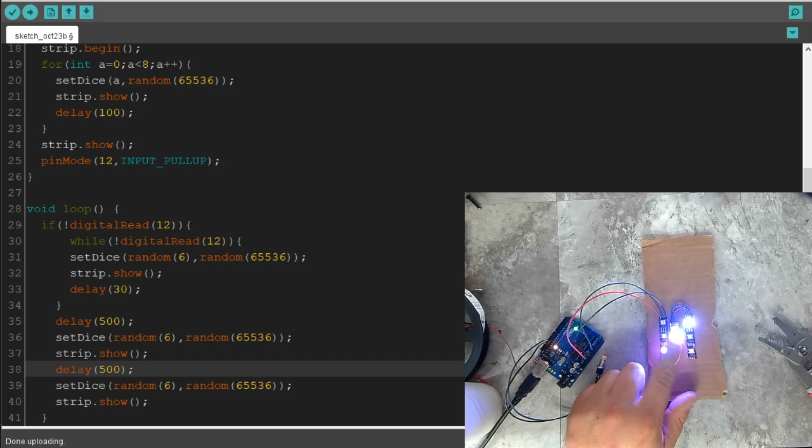All right, so now we're on to 216. We'll be making a Yahtzee game here. So right now we got a single dice, right? I hit the button and it starts rolling the dice, and it has a little bit of theater at the end. So I let go, and then the dice settles onto a number, right?

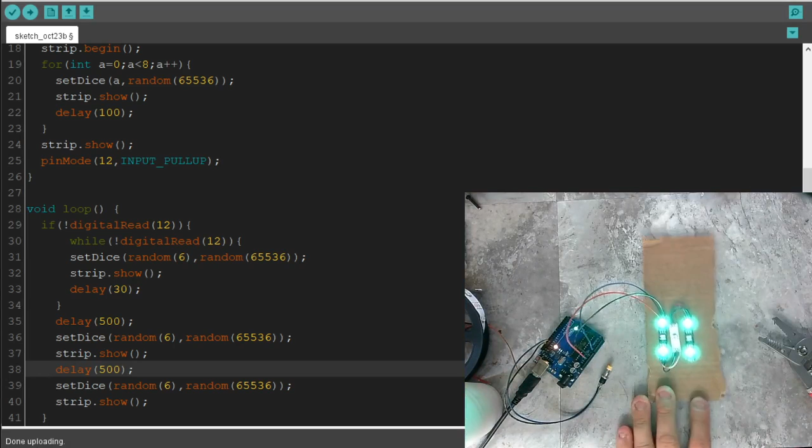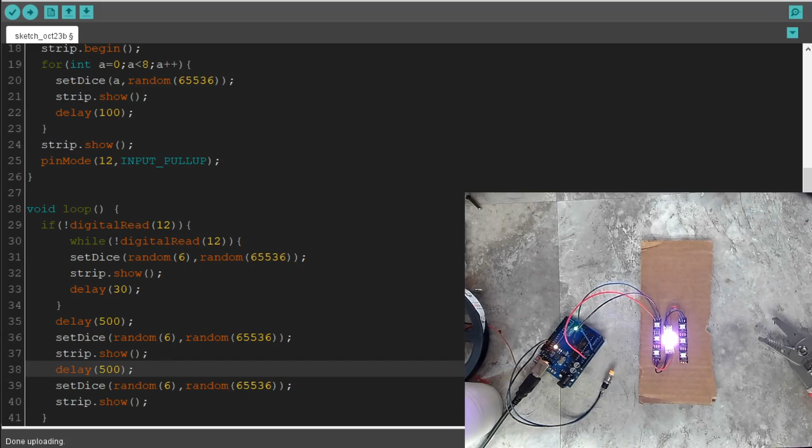So just use the sticky side, put it on cardboard, really quick soldering. Nothing fancy here, but it works. Okay, so this is our little prototype. Okay, next thing we're gonna do is have five of these in a row. In Yahtzee, there are five dice here, and I'll show you how to do that.

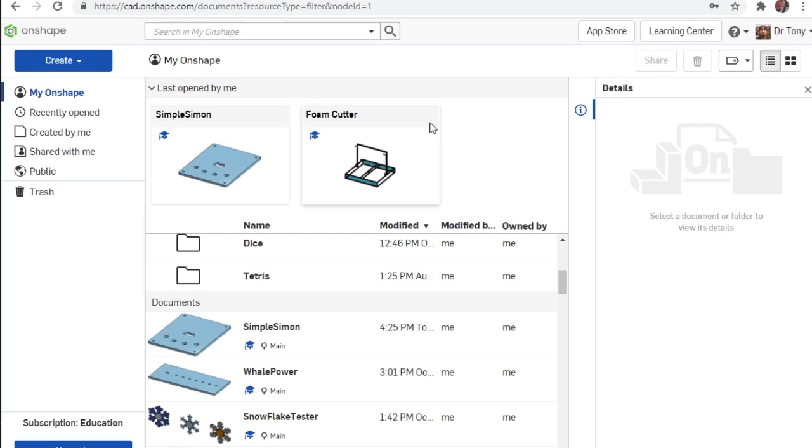So let's take a look at the design software. Okay, I like to use Onshape. That's my preferred design software. Okay, so let's create a document. We'll call it Yahtzee, and I'm pretty sure that's how it's spelled. And here's our works area, right? Okay, so I've got 30 per 1,000 millimeters, 1 meter, 30 per meter, and I've got 60 per meter. There we go.

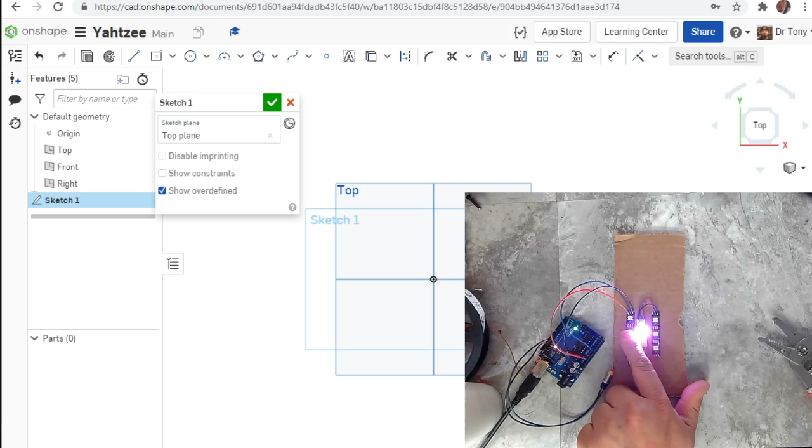Okay. So my plan here is to use 60 per meter for the center row, and then 30 per meter for the outside row, and skip one of the pixels every time. Okay. So I'm gonna waste 4 pixels. I guess I could use them for something, but really, I don't care. I'm just gonna skip them, make programming easier. Not a big deal. So let's work on that.

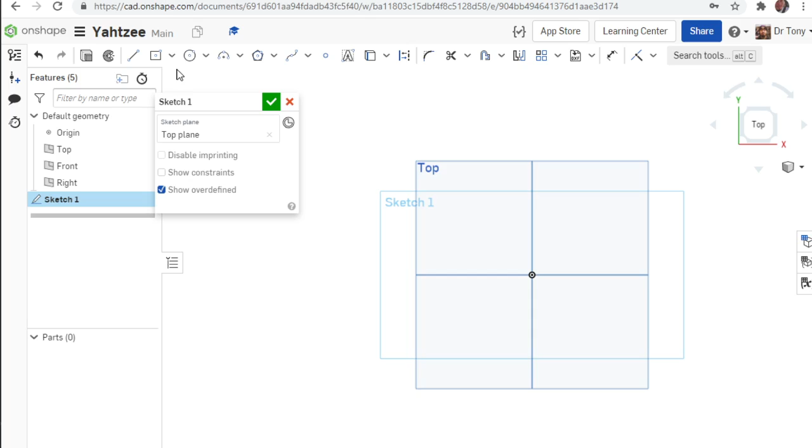So in our sketch here, I want some pixels in the middle, right? And I'm gonna make not a circle, I'm gonna make a square for the actual pixel to sit. So these are SMD 5050 pixels, which means they're 5.0 by 5.0, right? There's also 3535 neopixels, which is 3.5 by 3.5. Got some of those too, but 5050 is 5.0, right?

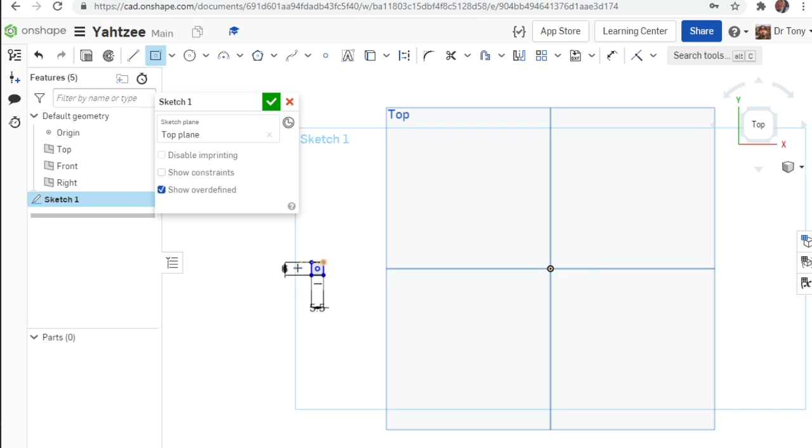So I'm going to give it a little extra space, 5.5, and give it a lot of extra space up and down so I can fit the solder joints that are in this thing. Okay? So I've got this here. Now I'm going to select it, and the distance is 1,000 divided by 60. Right? Okay, 1,000 divided by 60.

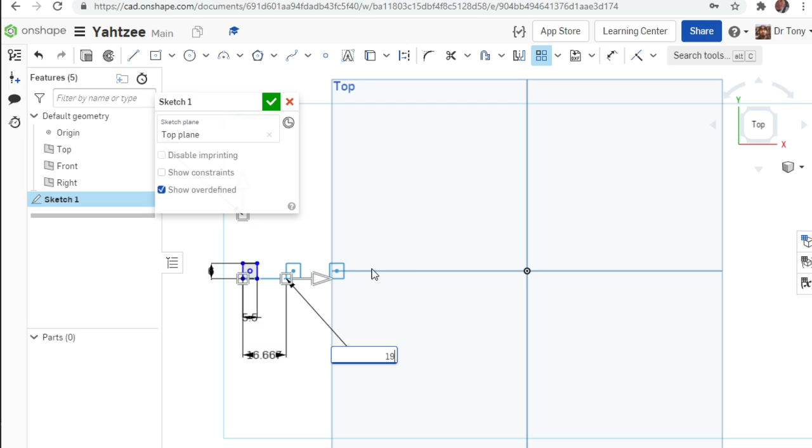I'm also going to need 3 times 5, which is 15, plus one in the middle, a sacrificial one. I'll show you what that means in a little bit here. Between the five, there's 4 spaces, right? So that's 19. So I need 19 pixels. There we go. Okay. And I think that's the center one. I'm going to lock that to the center here. Coincide those. Perfect. All right, wasn't the exact center, but that's okay.

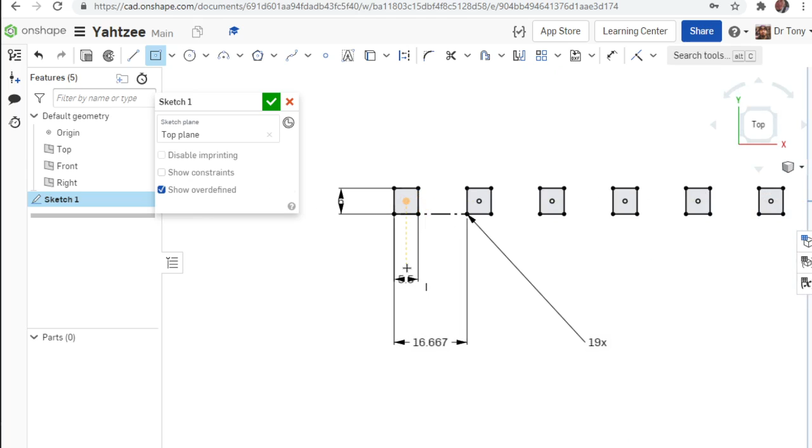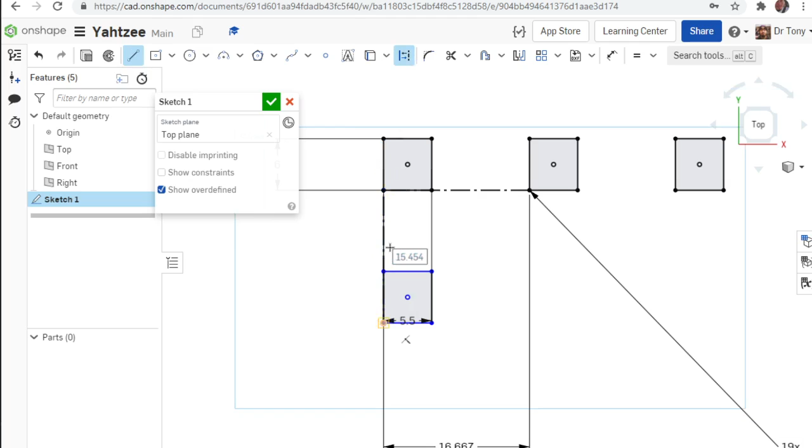I'm going to make another center point rectangle down here. Okay. Make it like that. Okay. This line and this line are equal. Perfect. Okay, now we got this line saying how far they are from each other, right? I'm going to do the exact same thing from here to here. There we go. Still blue. We're good. This line and this line are also equal. Cool. So we're going to be evenly spaced.

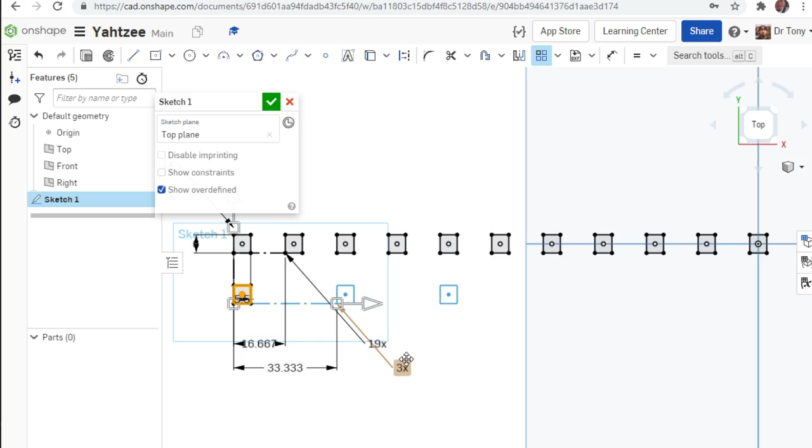And now I'm going to array these, do a pattern. So the top ones are 1,000 divided by 60. I'm going to use 30 per meter, so 1,000 divided by 30 for the ones down here, right? Okay, and I need 9 of these. 9? I need an even number, don't I? So 1, 2. I need 10 of these. 10. Perfect. Okay. There we go.

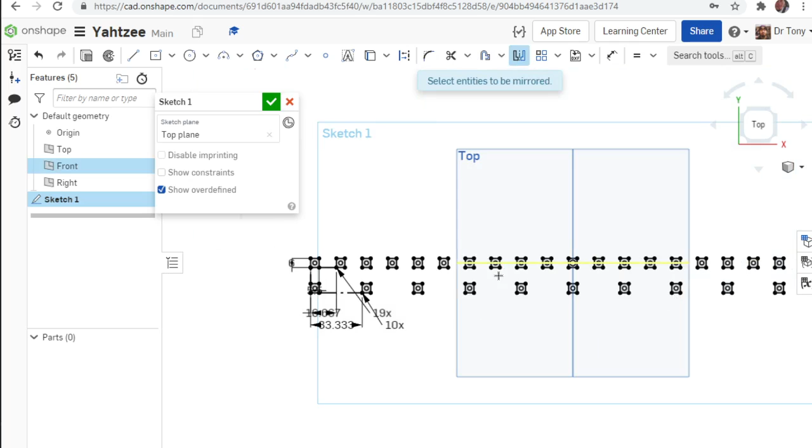Okay. And so now I'm going to do a mirror function. Grab the middle line. Select everything on bottom. There we go. Okay. So basically here's one dice, right? Then we skip that pixel. Here's another dice, right? Skip that pixel. Here's another dice. All right, I guess this is the center point, not that. Let's delete that constraint. And then move this around on top of that. There we go. Now we're centered in here.

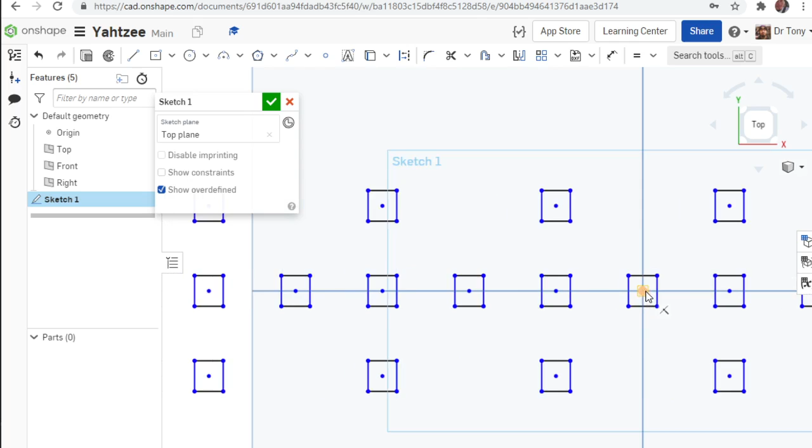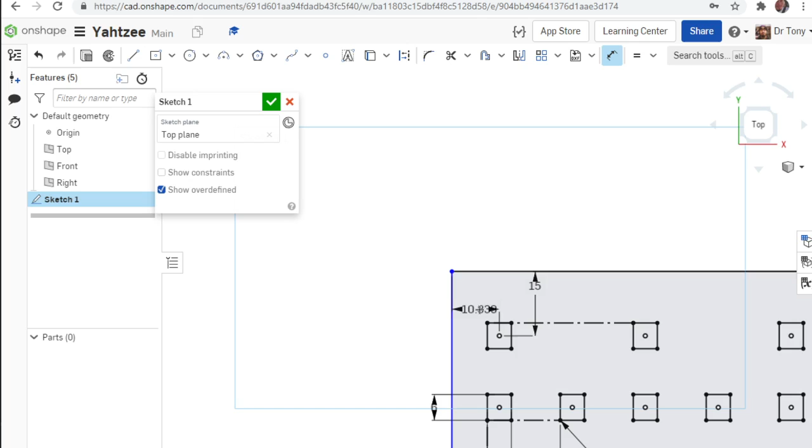Okay, cool. And now I'm going to put a rectangle around this. I'm going to start it from the bottom, and I'll show you why in a little bit. So let's make this. No, I guess from the center point, not the edge. From the center here, I'll do 15. From this point, I'll do 15. Okay? So this is just the first layer, the holding layer. Right? There's going to be a couple layers going on here.

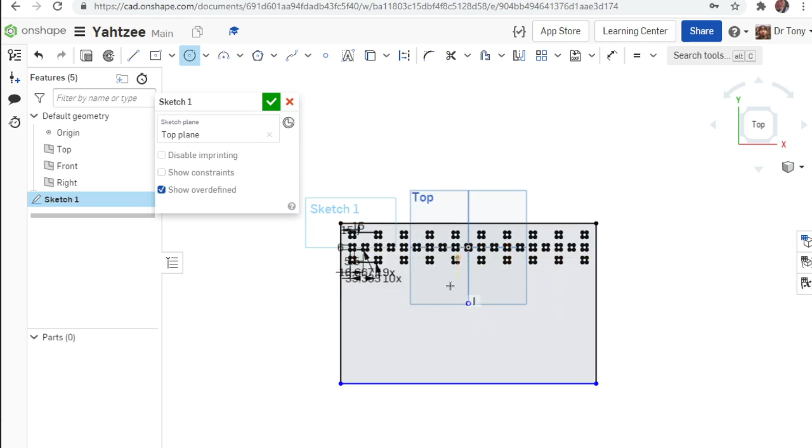Okay? Next thing we're going to do is buttons. So each one of these needs a button underneath it to hold the dice, right? So when you roll the dice, all these shuffle, right? Then you let it go, and then you need to hold some, and then shuffle the rest. So we need buttons down here to do that holding.

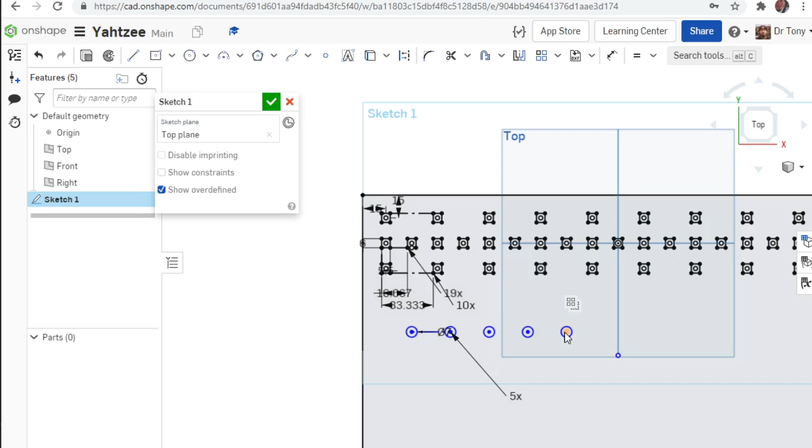Okay, so from this point, lock there. Last time I made it 6, I made them too small. These buttons are 7 this time. We'll see if that works out. Okay. And we want 5 of these buttons. Click that I'm done. Get rid of that constraint. And then I'm going to lock this over here to this and do a vertical constraint to that. There we go. So now it's held on to it.

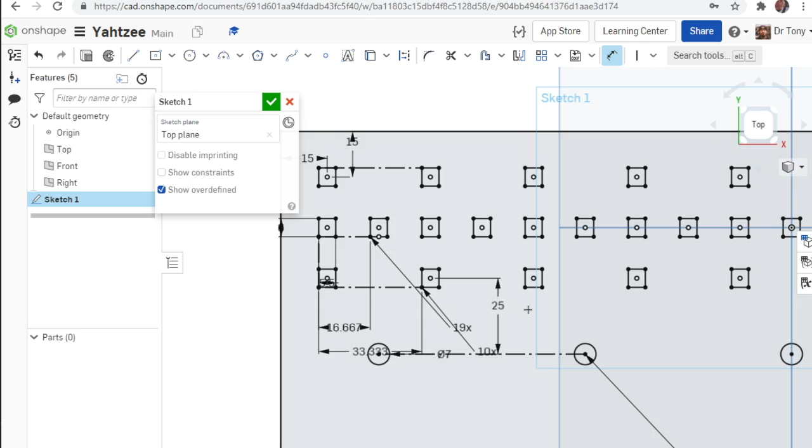Cool. I can still move up and down. I don't know how far I want to be. I don't want to be too close. Let's do this to the center line here. Let's see, that's 30. 25 is about an inch. Yeah, let's go with that. Okay, that works. And then we need, let's see, a strip right here, or button down here. That'll be our reset button.

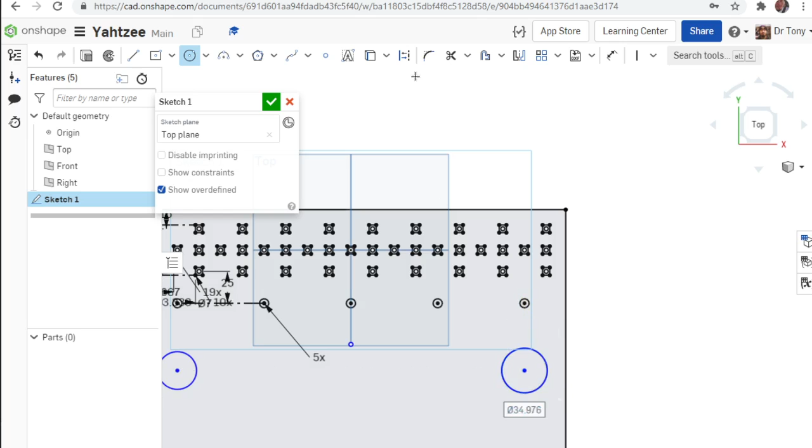And a button, let's see, float over this point, float over this point, come down here. There we go. Now they want to lock. So this will be our roll, right? We hold this button to roll it. We use these buttons to select whatever ones we want to hold, and then we hit this to roll the rest of the ones that aren't held. And then this button will do a reset, and so it'll turn off all the dice. We'll get to roll them again.

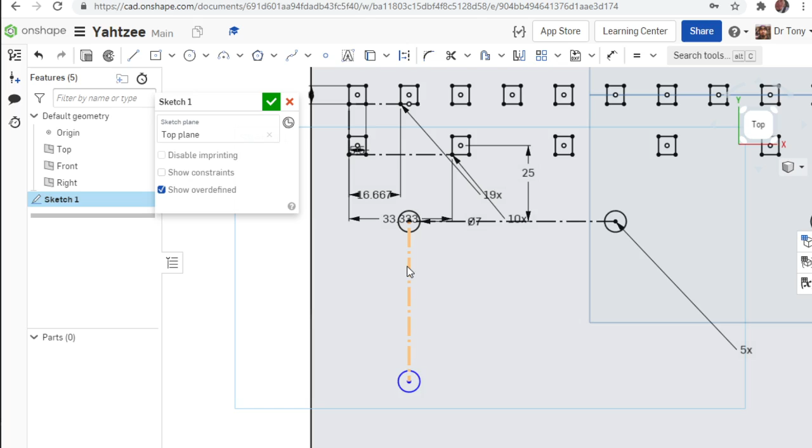Okay, select this, and this first one. Make them equal to each other. There we go. Okay, gonna make a construction line. Cool. See, this and this are equal. There we go. Okay. And then we need a little bit of a display in the middle here. So I'm going to sort of do it lazy-like. I'm just going to make a line hanging out, floating. Okay. Do a mirror.

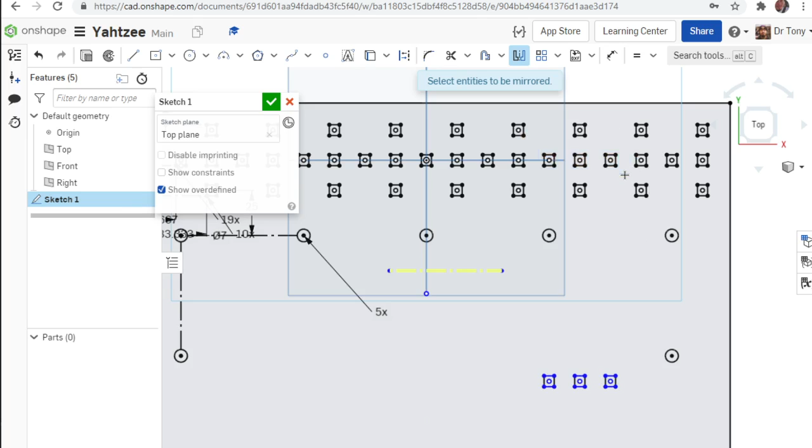And let's see. I guess I'll have it to the side, so I don't want this one in the way. How about right next to the shuffle? There we go. And so what I'm going to do here is use this to count how many times I've basically rolled. Okay. There we go. And I guess I'll have this 15 from the bottom here. 15. All right. There we go.

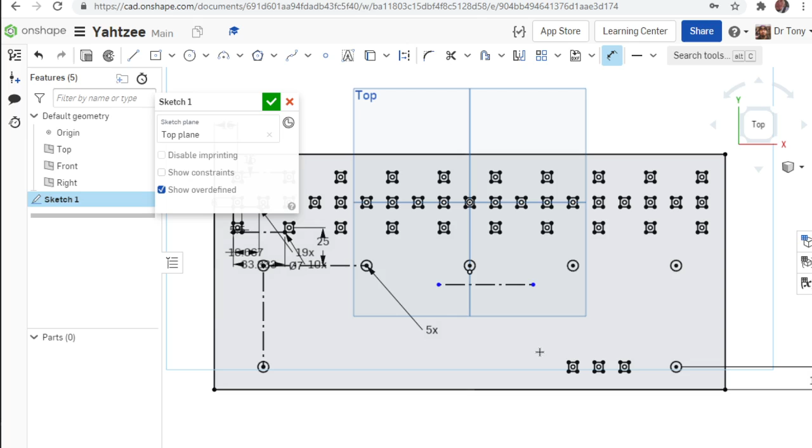And then all this right here, I can say Yahtzee, made by Tony, whatever else I want to say, or power switch. I guess I could do batteries and power switch. Maybe. Huh. Yeah, I'll do a battery on another one, or power switch on another one. That'll probably be in the 300 series, like making complete portable projects. So maybe that's a little advanced for 200. Okay. So, yeah, this is 216 here. So we're kind of a ways away from doing a lot of battery stuff. But, yeah, we'll call this good.

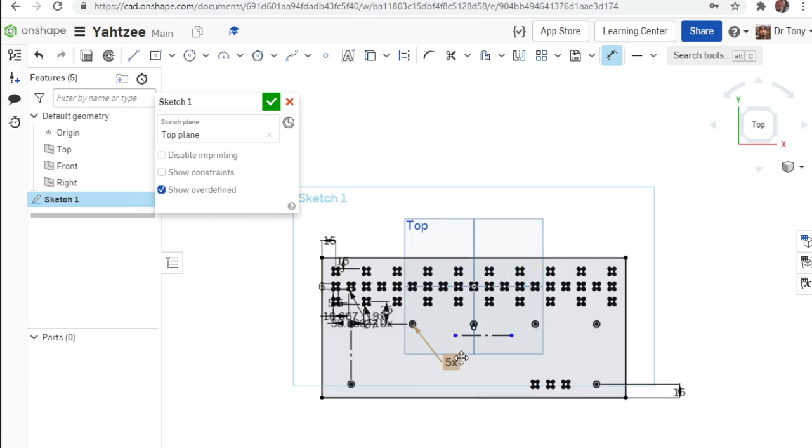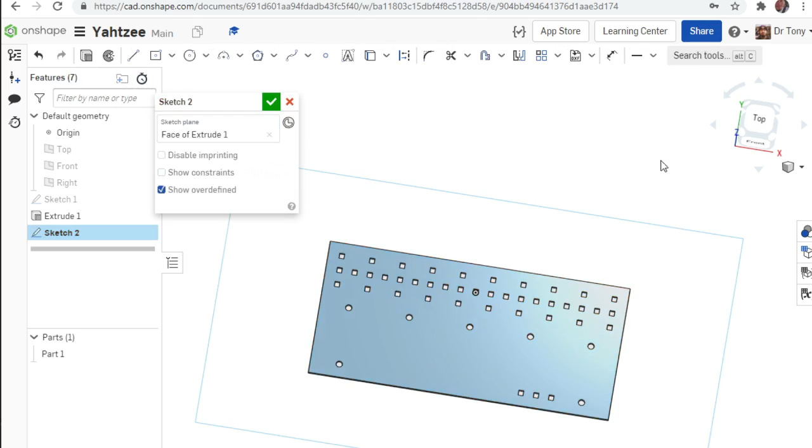I'm going to extrude this about 3, because I'm going to use 3mm acrylic. I'm going to turn off these annoying planes. There we go. So LEDs will fit in here. And then buttons will fit in here. Let's make one more. Whoops. Let's make one more layer to this. We're actually going to have 3 layers altogether. So I'm going to have these little circles in between all these.

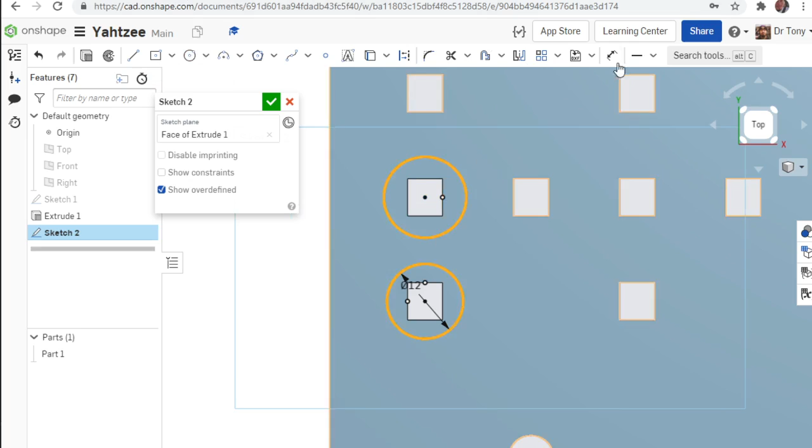Okay. Make them about 12 or so, right? Some place for it to actually shine. See, this will also be 12. So I'll take this and make them equal here. Okay. And then we need to array these. Whoops, not that. Turn that off. Turn this back on. Okay. There we go. And I think there were 19 of them. I don't remember. I can fix it later.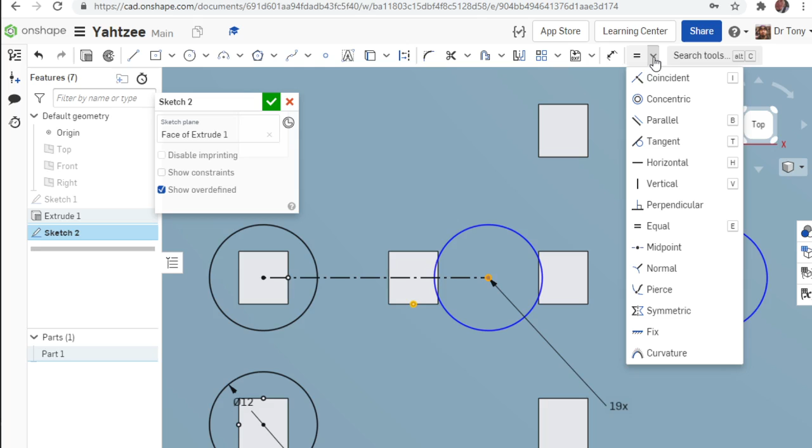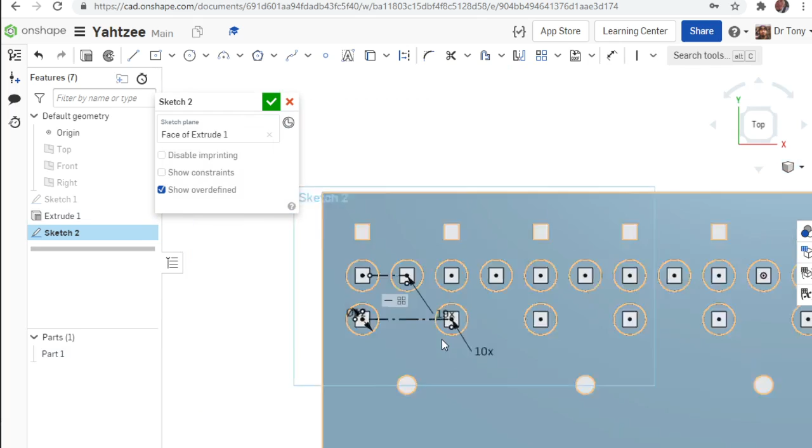Close that. Let's grab one of these. So this point and this point are now aligned. We got circles around all of them? Yep. Cool. Okay. And there were 10 of these. So you get rid of that. So you hover over. There's the center point. There's that. Do a vertical to that. Cool. Okay. Got little gaps there. Perfect. Take out my mirror.

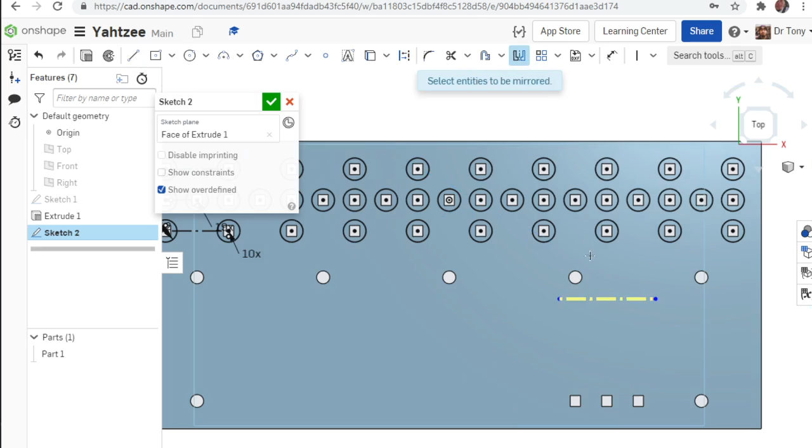And we want the front line. There we go. Cool. Okay. And then let's do similar to what we did just a little bit ago. So use my mirror. Grab this. See, I guess we're grabbing these three right here. Cool. Okay. Grabbing this point and this point, doing a horizontal constraint to this one. All right. And now we got the buttons.

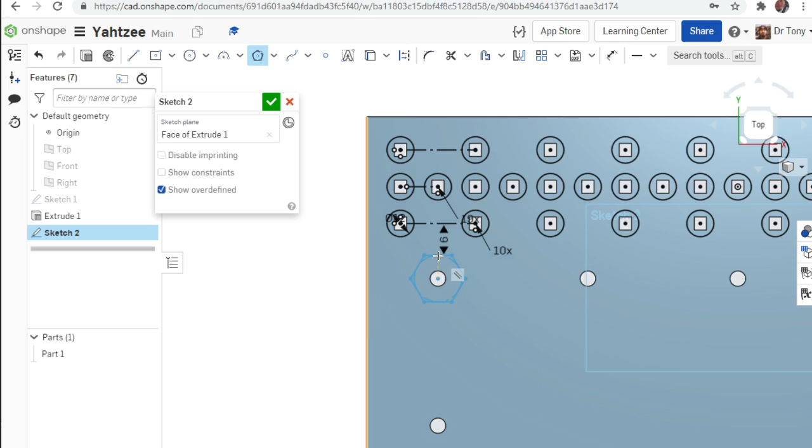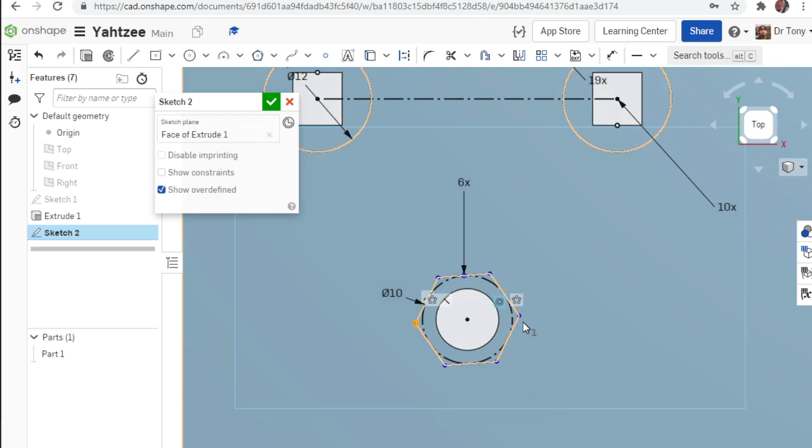So the little screw or the nut that holds them on is a 10 millimeter drive. So I'm going to take my polygon here. There we go. 6 sides. And I'm going to make this 10. All right. So then I can just tighten it from the back side, and this will hold on to that screw there. Cool. Okay, don't want that. So I'm going to take this and do a horizontal constraint. There we go. Now it can't rotate. And then we'll do an array.

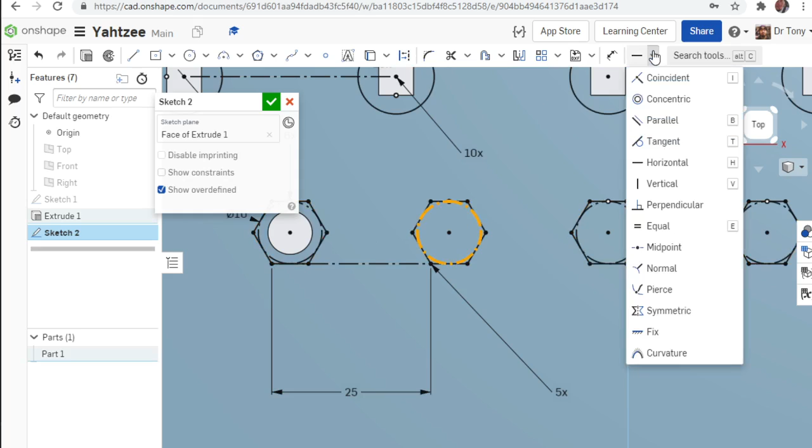And yeah, I really just want this. There we go. Okay, 5. Take the center of this—I guess not the center. Let's take that and this and do a concentric. Oh, it doesn't like it... oh yeah, got to get rid of that.

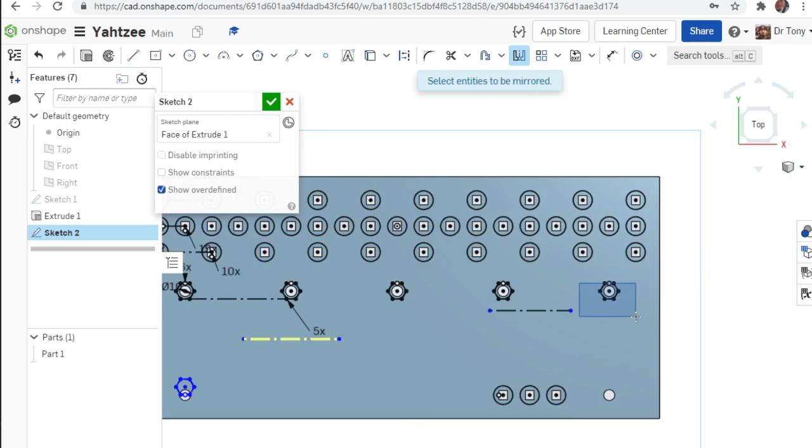There we go, perfect. Okay, then I'm going to do another lazy one with the mirror. There we go, do a mirror function. Select that... whoops, I think I missed. Yeah, I missed that one line up there.

There we go, okay, turn off my mirror. Grab this, grab this circle, make them concentric. Okay, we'll call that good. Let's see.

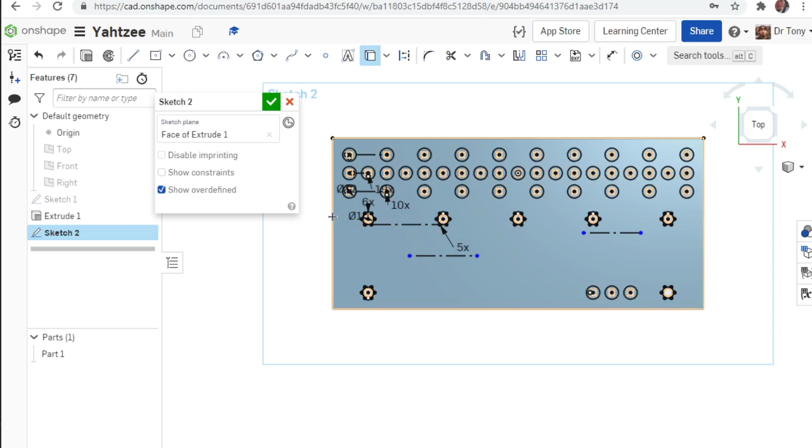Oh, we need to project these lines on the side. So use my project, project, project, project. All right, now we got all these. Let's extrude this, another 3, and make it new. There we go, okay.

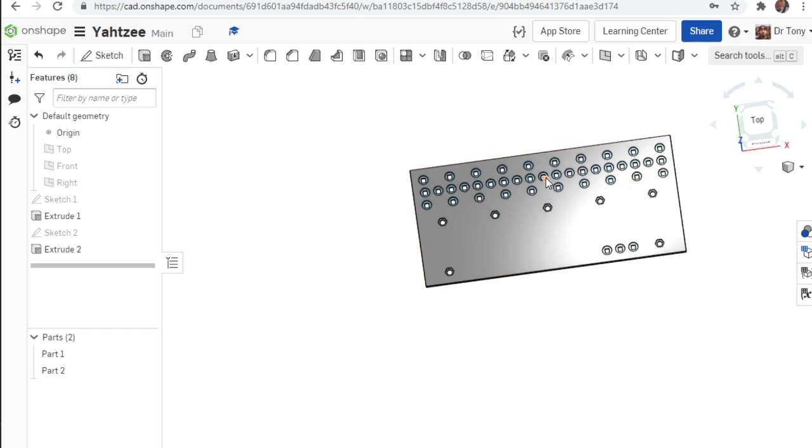And then we do the final layer here, and this will be sort of the clear coat. That one doesn't take much here. So we do a project, project, project, project. And that's really it—maybe a square for the logo if I want, but I don't know, I'll worry about it later. Yeah, so this is just a clear cover.

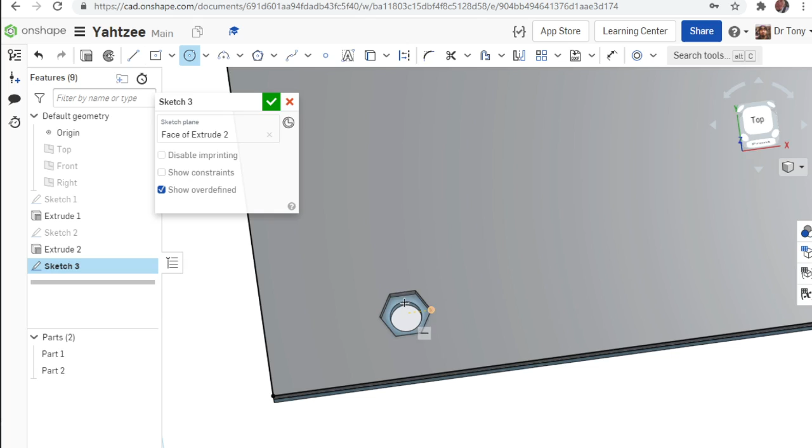Oh, I guess I need holes for the button now. Okay, so each one of these—let's see, I guess I'll do it on this one, that. Okay, and I'll make that not that big, 15 maybe. That's still bigger than necessary, but that's all right.

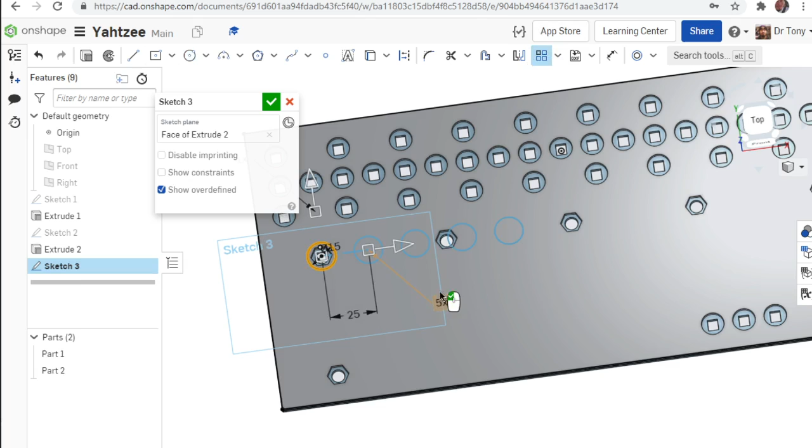Okay, do the array tool. There we go, pull that off. Okay, grab these two points, I'm going to make a vertical constraint. There we go, now we have a little circle on top.

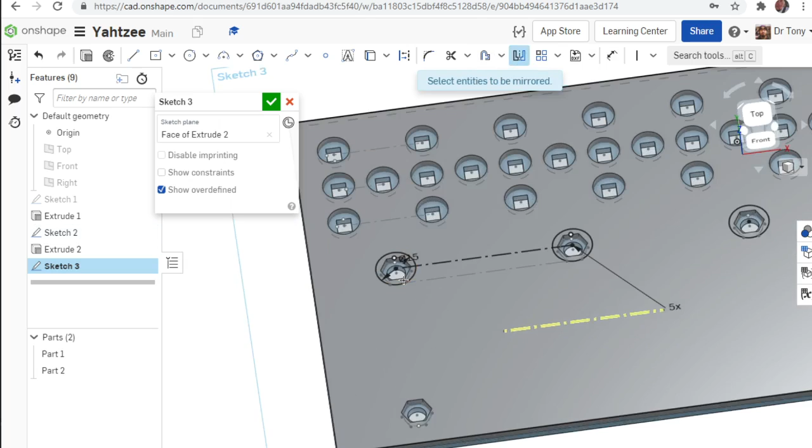And then I'm actually going to turn this sketch on. So you do a mirror function, steal this line. I want a hole there and a hole there. Cool, turn that sketch back off.

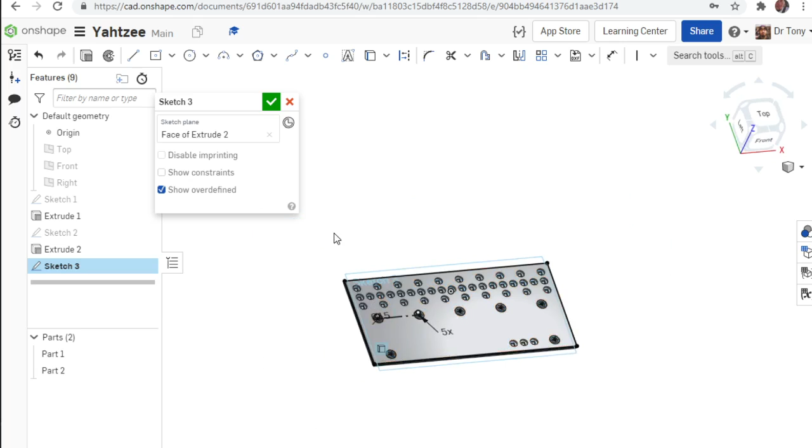All right, cool. Everything else will sort of mask and diffuse the lights. Okay, so even though these are able to light up, I don't have to light them up and they won't show. Maybe I could have them turn red when I've done too many rolls, I don't know, I've got that option. I'll figure that out. Then we need to extrude this, and then we're going to go 3 millimeters here. Make it new, all right.

Right click, edit appearance, do a semi see-through with a dark. There we go, so now you can see through what it's sort of going to look like. I'm going to use like a milky sort of look—that way it diffuses nicely.

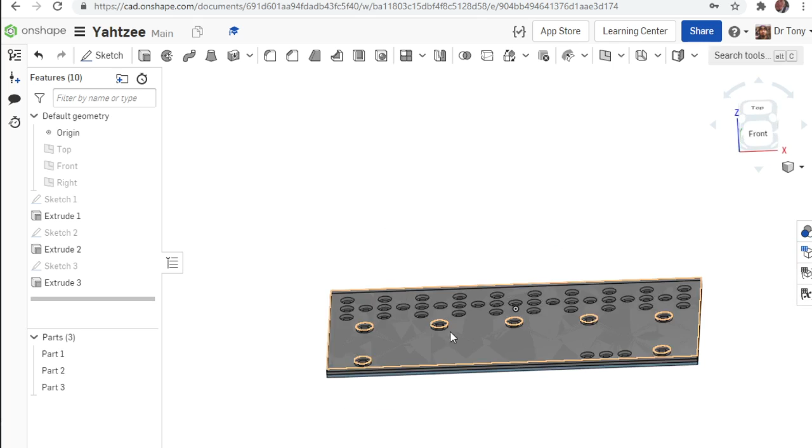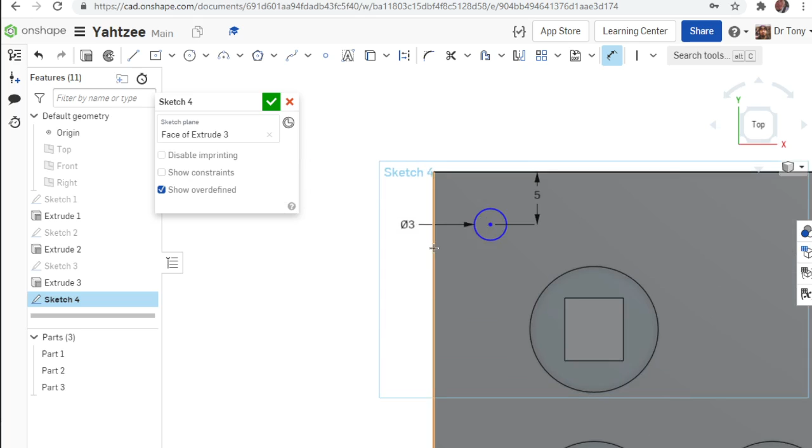Okay, and then let's make some mounting holes for everything so we can actually attach it all together here. So make that 3... 5 from the corner, kind of common of my stuff. 5 from the corner, there we go.

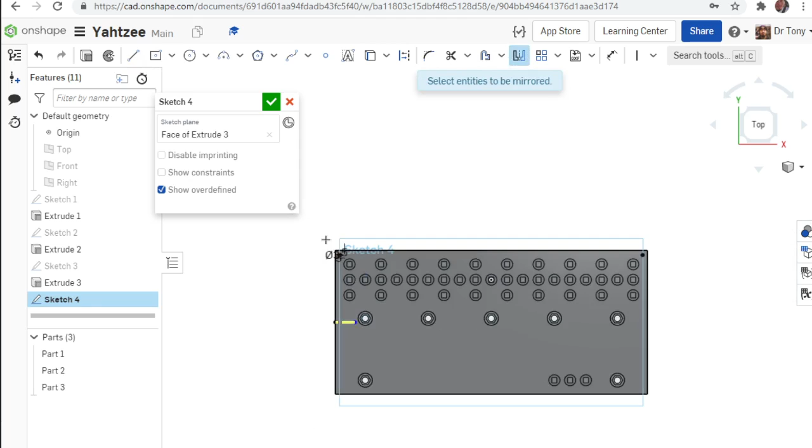Okay, I'm going to do a mirror. Let's see, what would that be, the right side. And then select that, there we go. And we don't quite have a center line for this, so I'm going to find the center. There we go, and use that as my mirror line. Select that—see, I want that, and I want that, okay.

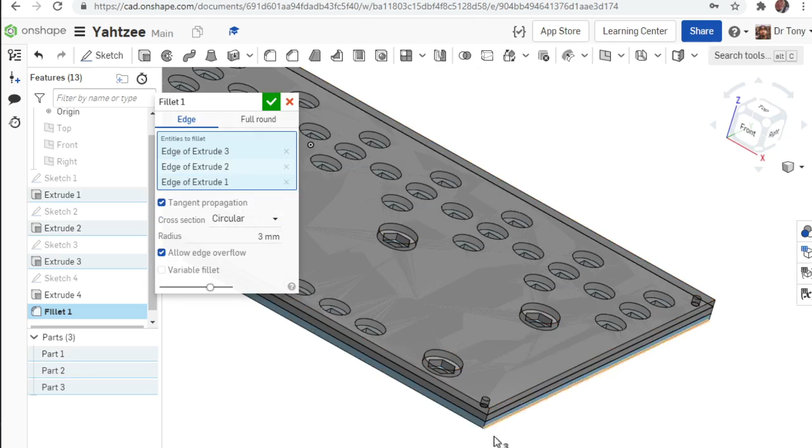So these are just alignment holes, right? So take this, going to remove, merge with all, right? Make the holes all the way through. All right, last thing we're going to do is round the corners, because we all like round corners. I'm a big fan anyways. All right, one more corner here.

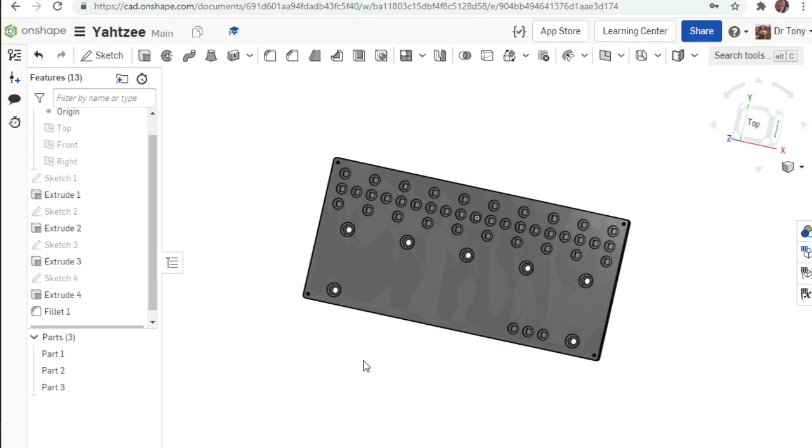All right, there we go. Okay, so here's our Yahtzee game. And I'll take one of these and put them on the bottom also. Actually, I'll put a plane up here, offset it—yeah, I think those are 30 millimeter standoffs.

There we go, and then sketch on this thing. Whoops, close that, there we go. Sketch on that thing, perfect. Turn off the plane.

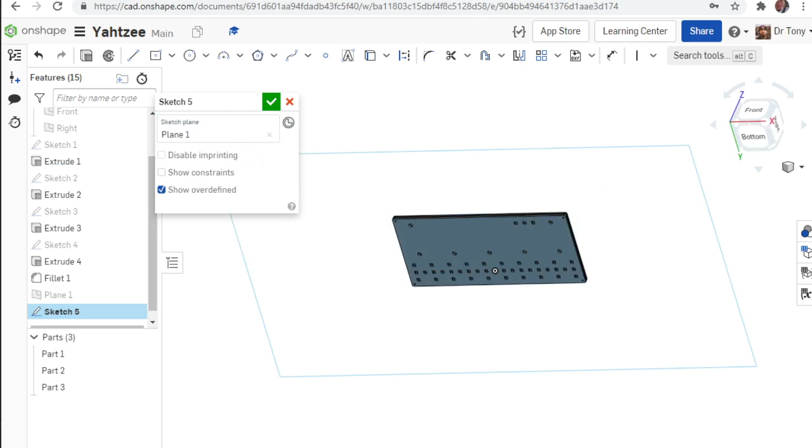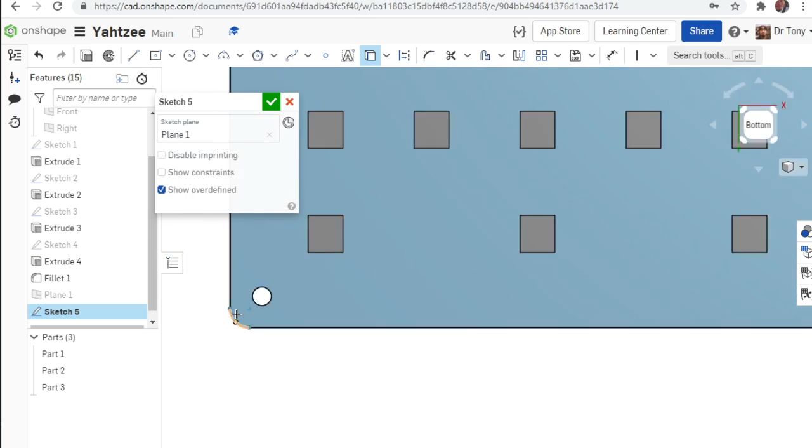And let's project all this stuff. So I want to project this line, this line, this line. Okay, this curve, this line, this curve, this line, and this curve. Oh, I guess we need the holes too, so we can mount the standoffs.

All right, so we'll have 4 different layers here. Perfect. And then we want 3 millimeter again. There we go, okay, so now we have a base.

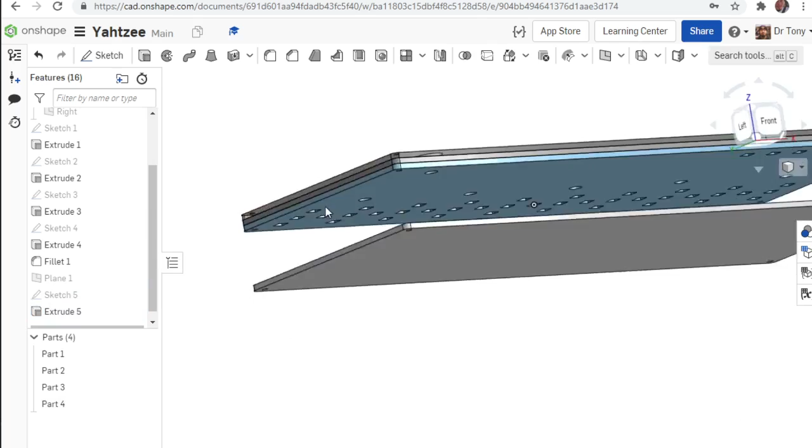The Arduino has plenty of room to fit in here. The NeoPixel strips all go across real easy like, and there's a little bit of space, and then we can diffuse it, so we got it nice looking. All right, I think we got everything.

Maybe we should label it. Maybe not, I'm not going to worry about it—I'm going to call this good. So I'll cut this out, and then I'll make part 2 where I actually build it.